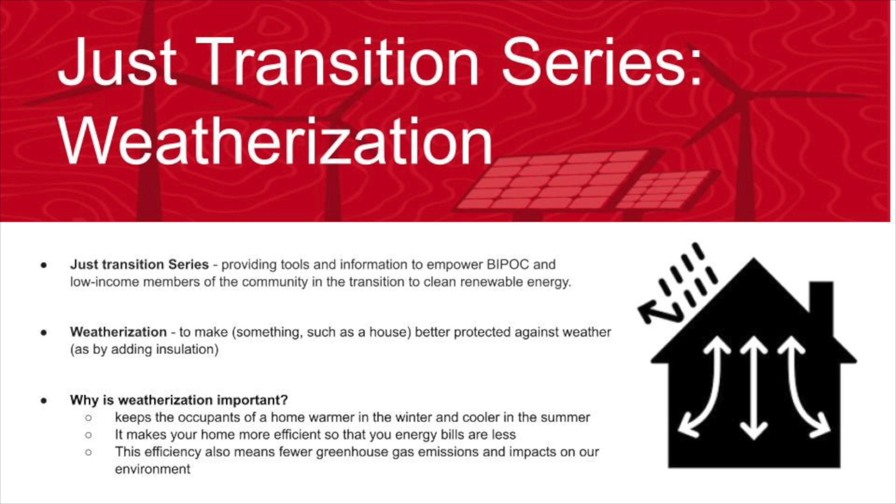In its basic sense, weatherization refers to measures which better protect homes from the elements, like filling gaps and adding insulation. Our presenters will go over this in more detail, but I wanted to go over a few slides to talk about how this connects to justice and equity.

Okay, so first I just wanted to start off with this graph. I think it's a helpful visual to see how your typical home uses electricity or uses their energy. As you can see, the vast majority of energy use is used for heating and cooling, whether that's air or water. So when we look at ways to make your home more efficient, it's a really significant way that you can cut your emissions and decrease your utility bills, if you're making sure that the heating and cooling you're generating is staying within your home.

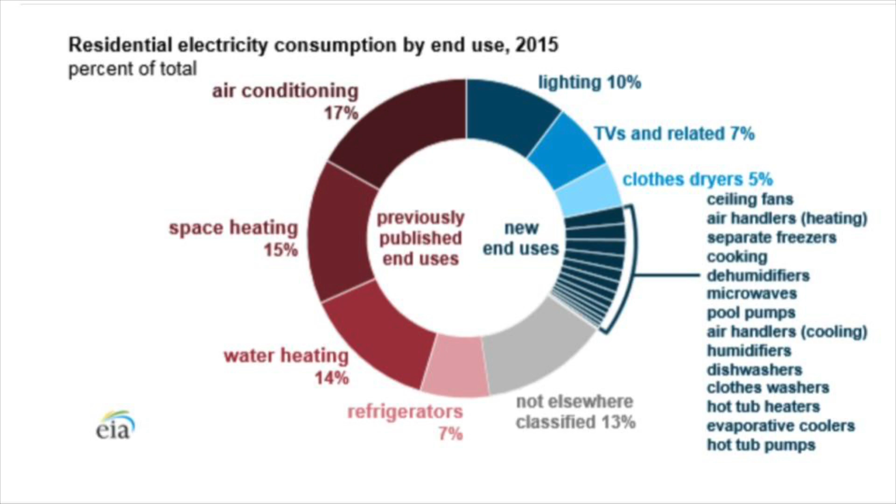As folks may have noticed, the cost of heating and cooling our homes has been up recently, and it's not just because of inflation. Rate hikes are increasing gas bills about 42% over the last 13 months, which is pretty dramatic.

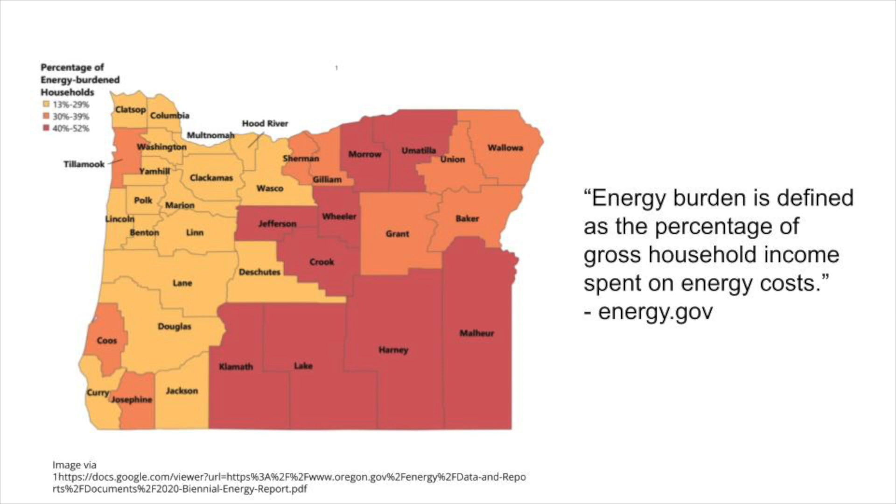The term energy burden refers to the percentage of gross household income that is spent on energy costs. Low-income households typically spend a larger portion of their monthly income on electricity, gas, and heating. According to the U.S. Department of Energy, the national average energy burden for low-income houses is around 10% or more, which is about 3 times higher than households above the low-income threshold, estimated at 3.5. In some areas, energy burden can be as high as 30%.

So the people who are making the least amount of money are paying the most on their utility bills, which is silly.

Why is this the case? Because low-income and historically marginalized groups are more likely to live in housing that is deemed not adequate. According to U.S. Census data, low-income households make up 37% of respondents, but represent more than half, or 56%, of households with inadequate housing conditions. So this, among other things, can mean that a house may not be well insulated, there may be gaps, there may be other things that cause the houses to leak heat, therefore requiring more energy to heat or cool.

Adding insult to injury, low-income households have the least access to energy-efficient appliances or other clean energy technologies, such as heat pumps, which both heat and cool homes. As we know, in Oregon, the summer heat waves we are now experiencing require cooling. In a lot of cases, heat-related deaths are going up. It is dangerous not to be able to regulate the temperature in your home as the climate is changing.

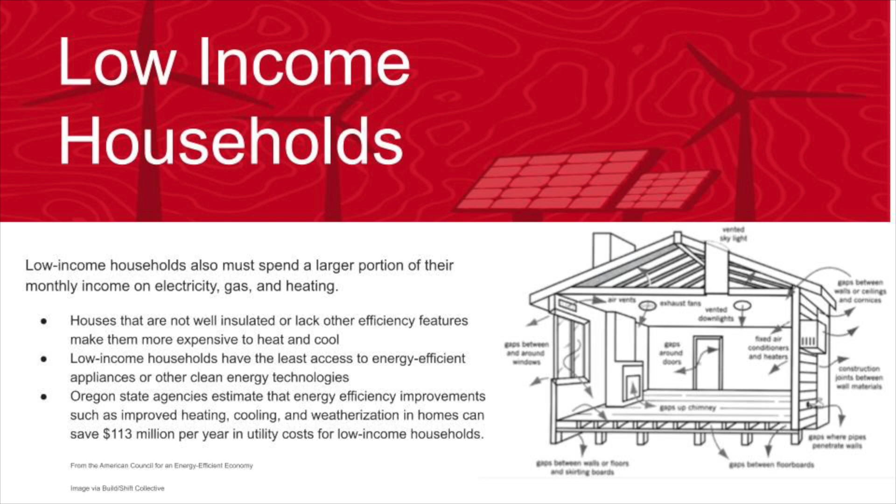Oregon state agencies estimate that energy efficiency improvements, such as improving heating and cooling and weatherization in homes, can save $113 million a year in utility costs for low-income households. So weatherization is a great tool to help folks lower their emissions and reduce energy burden. But I want to turn it over to the experts, so I'll hand it over to Charlie.

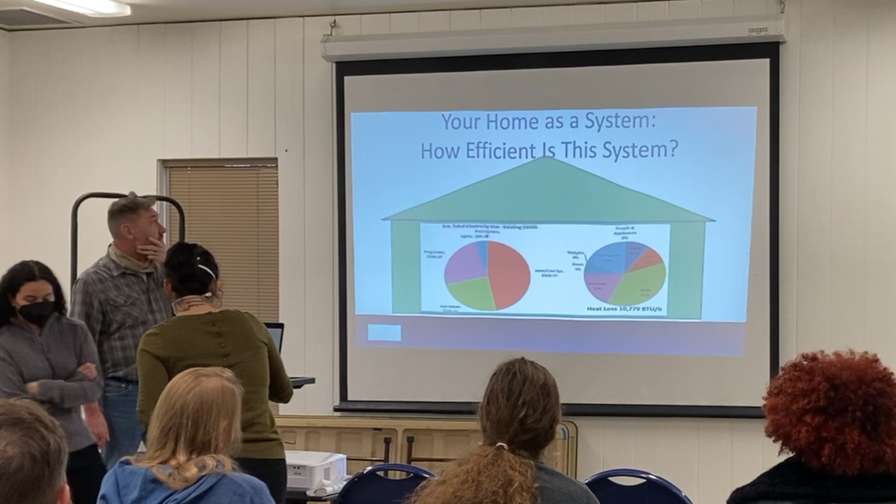So I'm Charlie. I work with EWEB. I've been there since 2001. Before that, I was with Springfield Utility Board. I'm a Springfield boy, a Lane County boy. I grew up here since 1966.

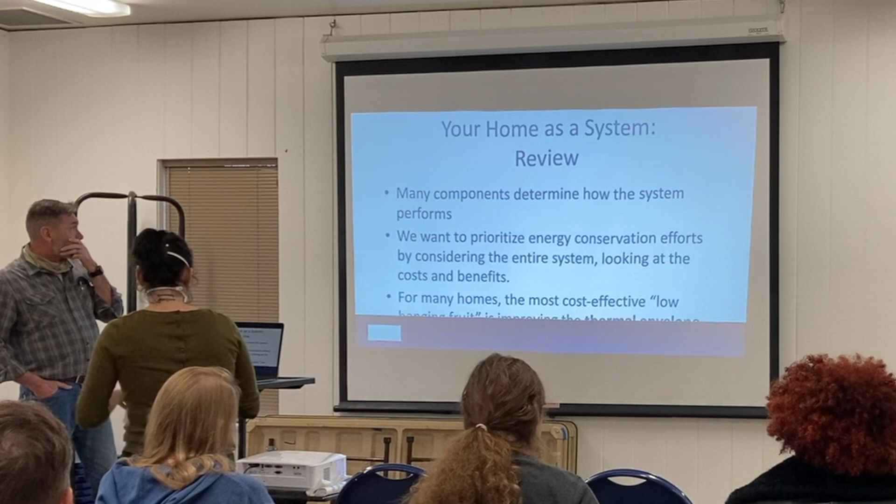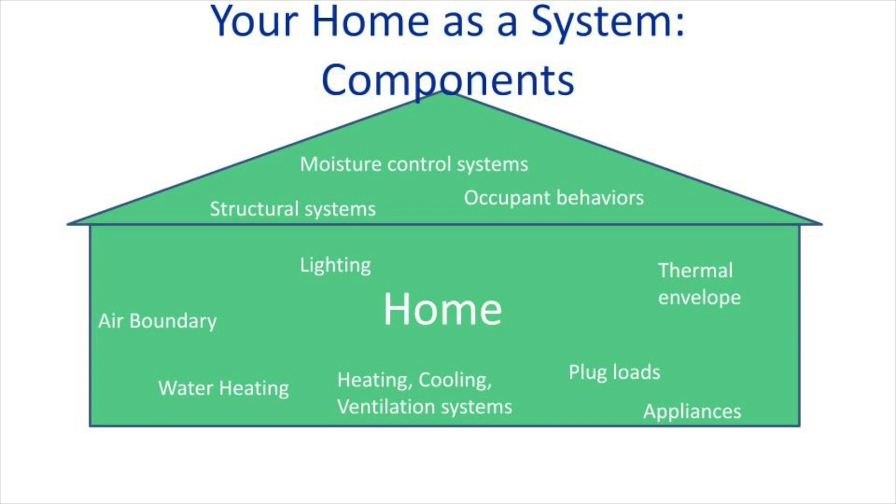I do a lot of these educational profiles, I do a lot of energy education, so we tend to look at the house as a system, and there's a lot of interactions. We've got moisture control, structural systems, trusses, walls, headers, and so on, and occupants' behavior. When we talk about the thermal envelope, we're talking about the exterior, the outside, as well as windows, floors, and attics, plug loads, heating system, appliances, lighting.

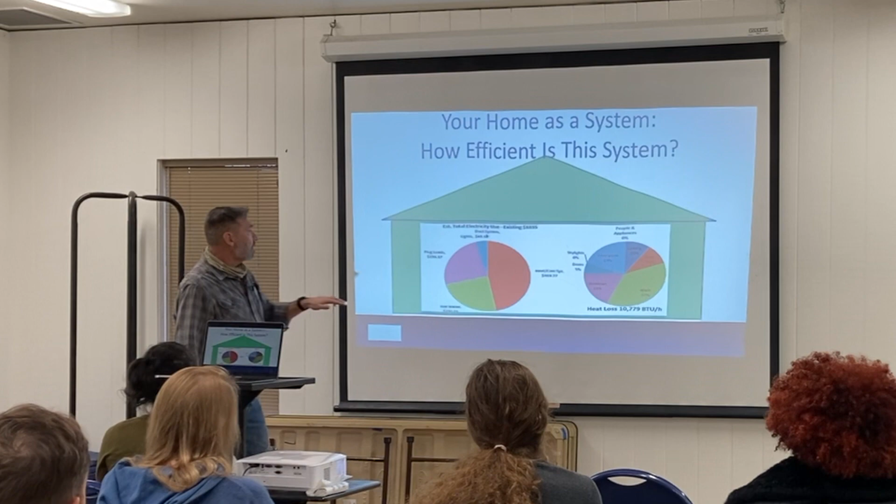A little bit different graph than what you just saw, but kind of along the same vein. In our climate zone, west of the Cascades, probably in the wintertime, you're looking at close to 50% of your utility bill, whether it's gas or electric or wood or oil, going to heat your house. About 50% of your utility consumption is going to be heating.

Just a little bit less than 25% for water heating, again depending upon occupancy, how many people, what kind of hot water load you have. These are just rough numbers. Plug loads have become a huge deal—they weren't like this when I got into it in the 90s. Most people didn't have iPhones or laptops back then, etc. Then there's lighting, and cooling is mixed in here somewhere as well. Cooling in our zone has gotten warmer, but it's still a relatively thin slice of your overall utilities year round.

When we take a look at that, I'm looking at this from the heating side and the water heating side primarily. Then we can start breaking out the house as a system. Walls are a big source of thermal loss. This is the heat loss for a home, close to 11,000 BTUs per hour—and that's a low number for a home, honestly. We're right around 37% for the walls. The next largest area, which you might imagine, is a hole in the wall covered by glass—a window—at 19%. Then doors, and infiltration, which is leaks in the house. Ceiling and floor account for about 10% apiece, for about 20% total.

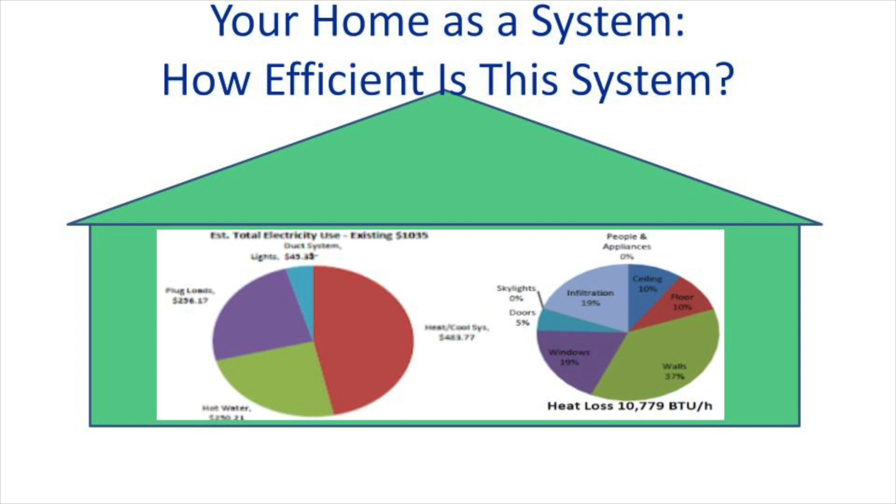So that gives us an idea of how to attack the home in terms of the thermal envelope. The idea here is to concentrate your efforts where you get the biggest bang for your buck. I'll condense this slide for you—that's basically what we're talking about.

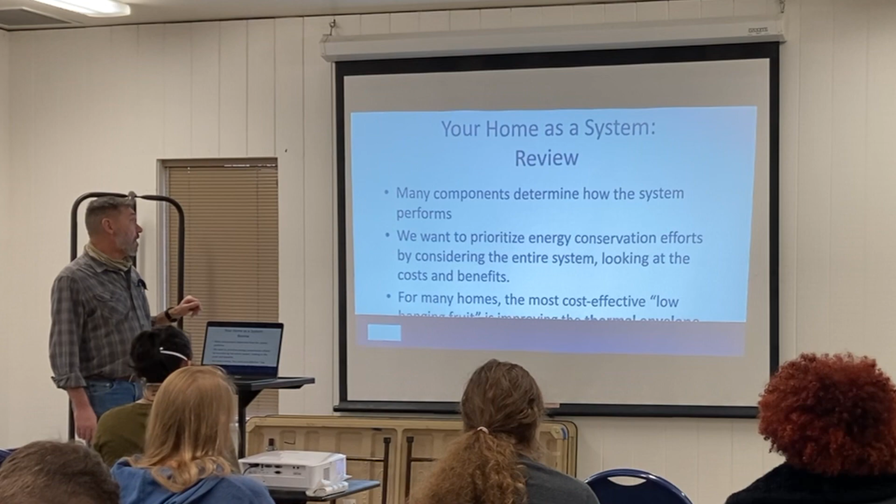In most homes, the low-hanging fruit is not going to be a new expensive $20,000 heat pump system or better—it's going to be insulating your walls, floors, and attics. Insulation, maybe new windows if you've got single pane windows, and there are other things you can do with existing windows. Also take a look at air barriers and penetrations—air that's leaking into the house, for lack of a better term. So you're looking at this in terms of a thermal plane, a thermal envelope, and an air barrier.

Now I want to be real careful about this. Insulation—fiberglass, which is most common now, or vermiculite, or cellulose—is a thermal barrier, it's not an air barrier. The fact that you have insulation creates a thermal barrier, but it doesn't do anything for the holes that are in there. Air still comes in and out of it. I want to be real clear about that.

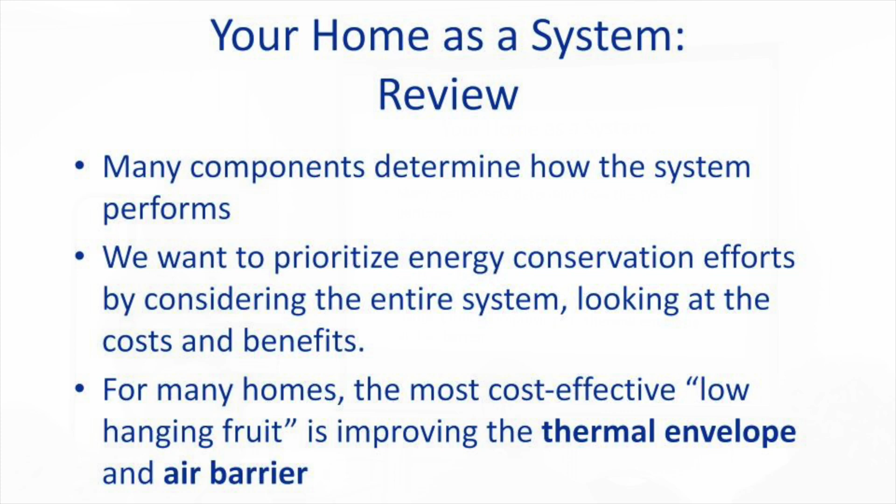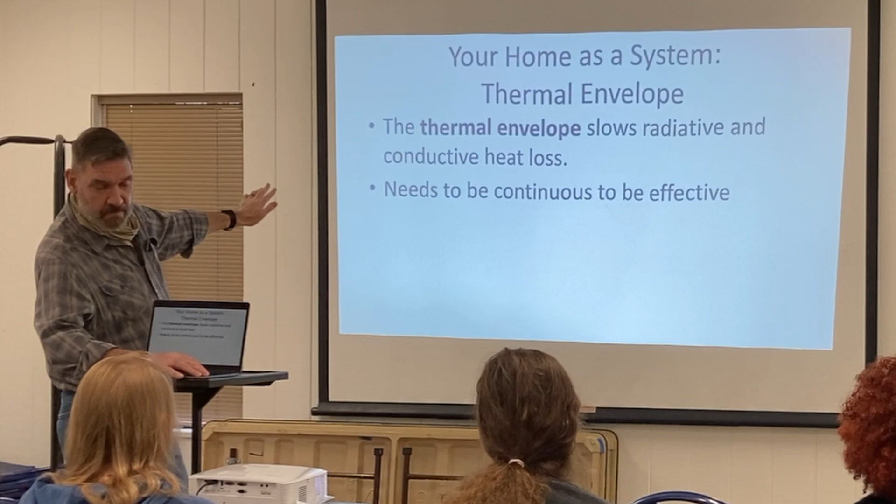So this is kind of where I was going with it. The thermal barrier slows the heat loss, the conductive loss—the holes in the wall, eliminating those in the floor or the attic. And you eliminate infiltration, air leakage.

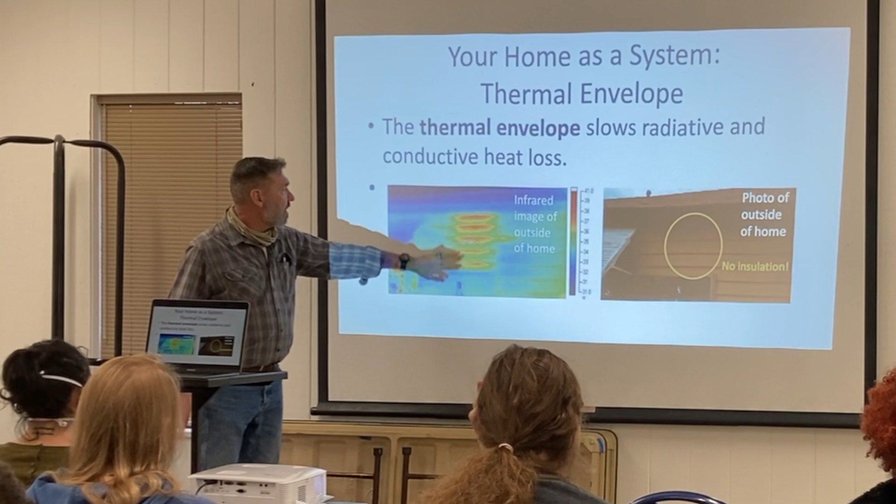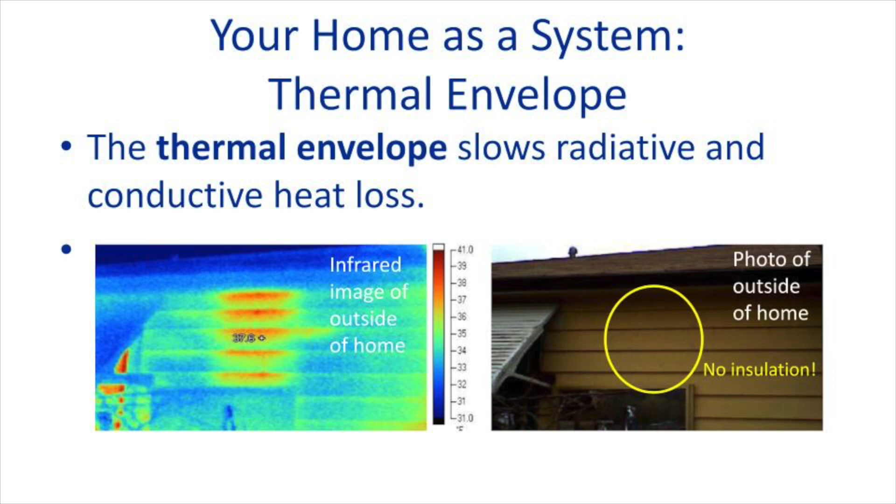This is just an example—we use infrared imaging, which has really come down in cost. This shows this area over this window right here; you can see the heat loss coming out through the infrared technology. There's no insulation in that. One thing to remember about heat energy: it moves to where it doesn't exist. Every bit of heat in this building is trying to pass through this wall to this window, and this building is trying to come to a thermal equilibrium with the outside. So this is where significant heat loss is going on, as outlined by the camera here.

The easiest way to deal with that is insulation. The way you deal with insulation in the wall is, depending upon the exterior wall components, we pull the siding off—lap siding that comes off, and they tack it back up. They drill holes in the wall and fill it up with insulation.

Floor insulation is really unique in this perspective. If you're insulating something, it has to be in contact with that thermal barrier for it to work. So if you crawl underneath your house, or like me, you do the flashlight thing, you look up, and you see your insulation bowing in the floor, it's probably not doing what it's designed to do. You've got an air gap in there and it's not insulated because it's not touching the subfloor. Resupport it, lath, twine, whatever you got to resupport it. I'm trying not to step on your toes and do it yourselves too much.

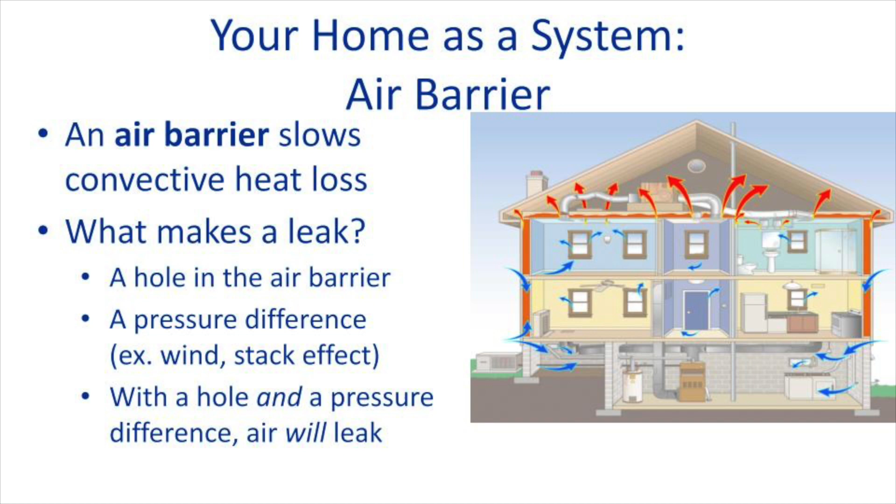This is a good slide for talking about where the leaks are at. First thing I do, I get a lot of high bill calls this time of the year. It's the other thing to understand, when it gets cold, your heating bill goes up, right? That's based on temperature difference, what we call delta T. It takes more energy the larger that difference is to keep your house at 68 or 70, whatever you're heating to. When I walk into homes, the first place I go and look is if they have a fireplace.

I shine my flashlight up there. There's a penetration that if you don't close that damper, that's a hole this big in your house.

There's a little bit of energy. Fireplaces are a terrible way to heat your house. But they're great for having a glass of wine on a Friday night with your spouse or significant other when the kids are gone. I'm not the Nazi about that stuff, but recognize this: as the fireplace is heating up, it's pulling warm air out of the house. It gets to a point where it's finally actually putting out a little heat, and then it dies down. Nobody can close the damper while it's dying down without dying, or waking up with a very big face and a headache. So don't try to heat your house with that. It just won't work. Stoves, inserts are a little bit different thing, obviously, but fireplaces, even with sealed glass doors, please don't heat your house with them. Anyway, that's my little Gestapo brown shirt.

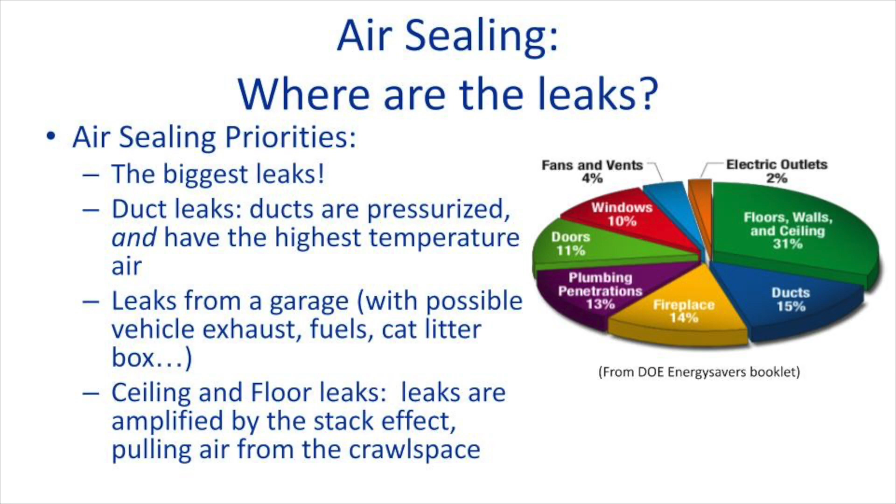Doors, threshold kits, anytime you can see daylight through a door. Weather stripping, I think there's some stuff back there for that. Weather stripping, threshold kits, these are all available at any of your local retailers, Lowe's, Home Depot, Walmart, blah, blah, blah. They're all there.

Fans and vents, just the penetration through the ceiling is probably the first place that you'll see a hole. They're not foamed, they're not gasketed, they're there. The other thing is that exhaust fans should have a butterfly damper in them, so that the only time they're open is when the fan's running.

Outlets, switch plate covers on exterior walls. There's one down here for those that you can't see. You put your hand on it right now, you can feel it's conducting cold. On a windy day, you'll probably feel a breeze. They make gasket covers, I have some back here as well that you can take a look at. They're just a little styrofoam gasket. You pull the switch plate cover off, put it on, screw it back on.

And then floor, ceiling, the wall, again, these are plumbing penetrations.

Romex electrical wiring penetrations. None of them are foam, unless you do it yourself. Let's move on. The other thing I should mention is don't forget the penetrations to the garage.

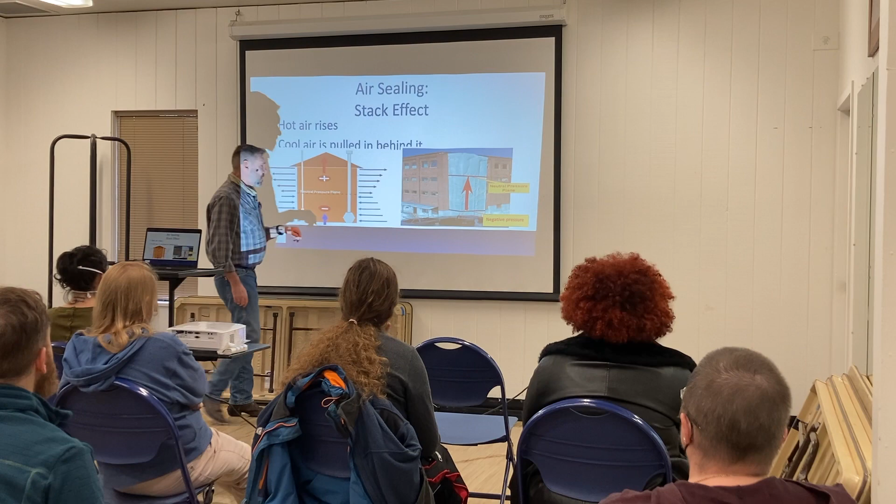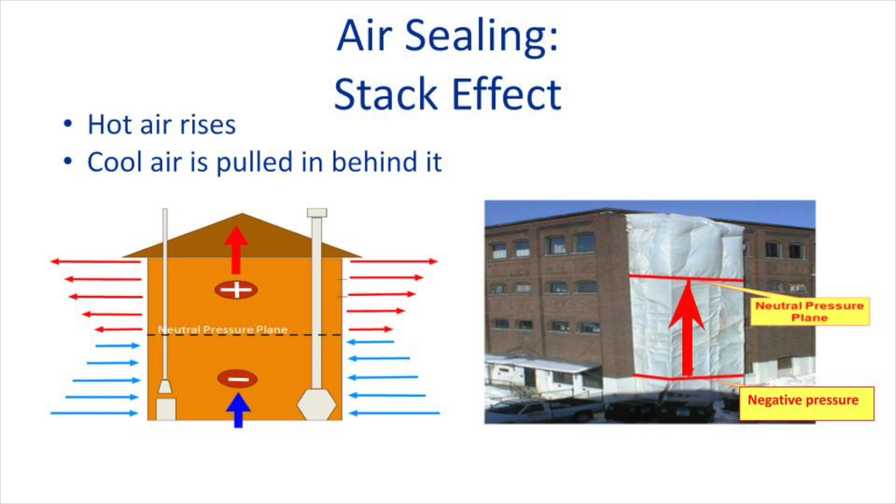You can get nasty carbon monoxide from that. This is the stack effect, a great slide. You probably can't see it too well, but this is a building with a lot of leaks. On the lower levels where the air is cooler, it's pulling in air. As it warms up, you can see this collapsing and this expanding. That air is coming in, heating up, and getting expelled out of the building through leaks. This is what they call the neutral pressure plane, probably somewhere where no human actually exists between levels.

My wife asked me to do that. She was crazy when I did it.

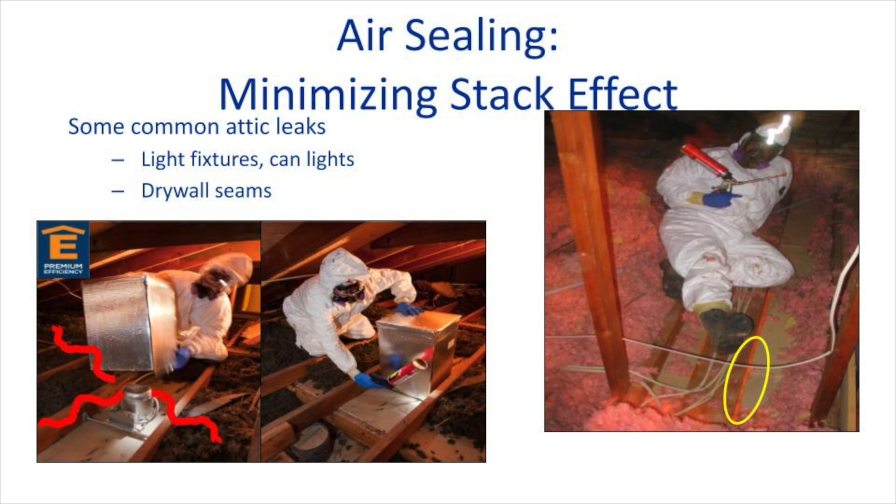More of the same stuff. This is ductwork leaks too. This is building some fiberboard cans over recessed lighting to keep it from leaking, but also to keep insulation from going in there when they blow the attic to re-insulate it. The pink fuzzy stuff that makes you itch insulates your house.

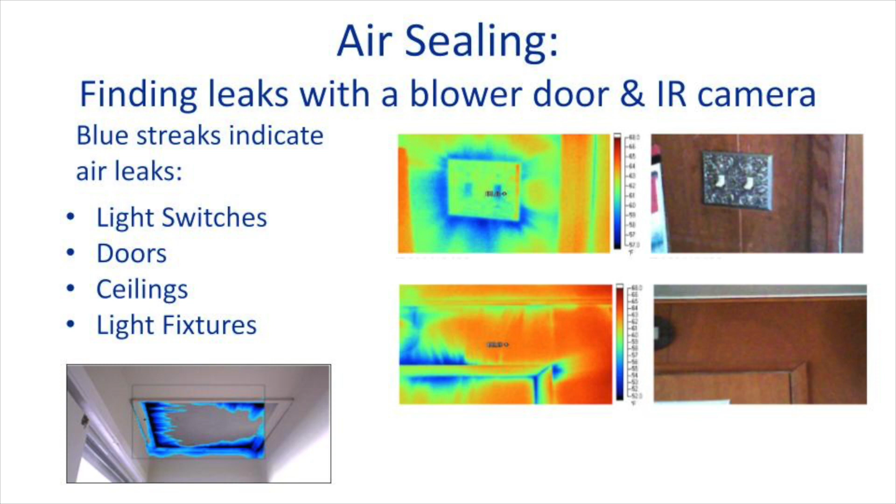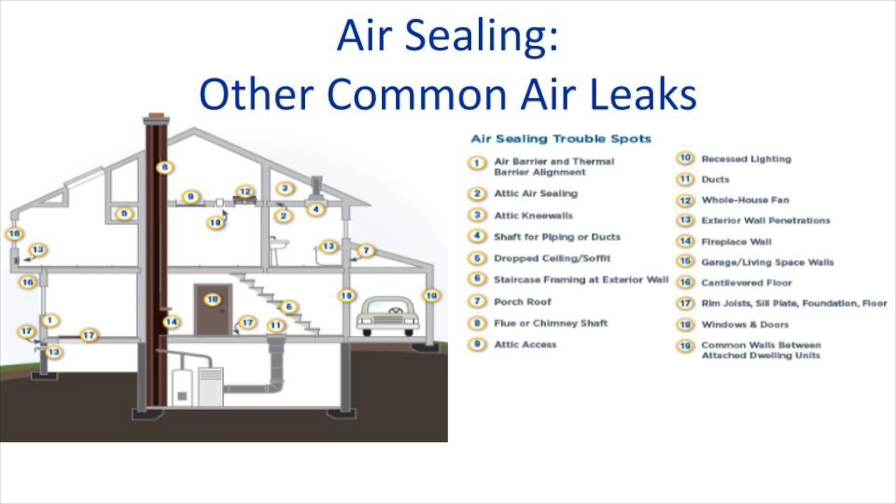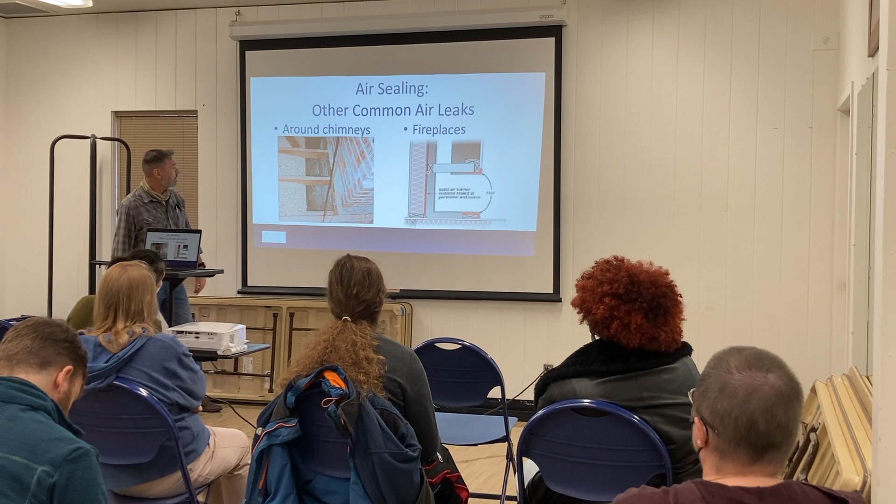Let's move to the next slide. I'm not sure where we're at - common leaks, just about anything you can think of, but there's a list of it there. Cantilevered floors and pocket doors leak like a sieve to the attic and crawl space. Fireplace walls - they built the framing around the fireplace flue in the attic that should be filled up. Here's a great example of what I was talking about: the chimney up in the attic isn't sealed. In that spot, your attic and your house are communicating.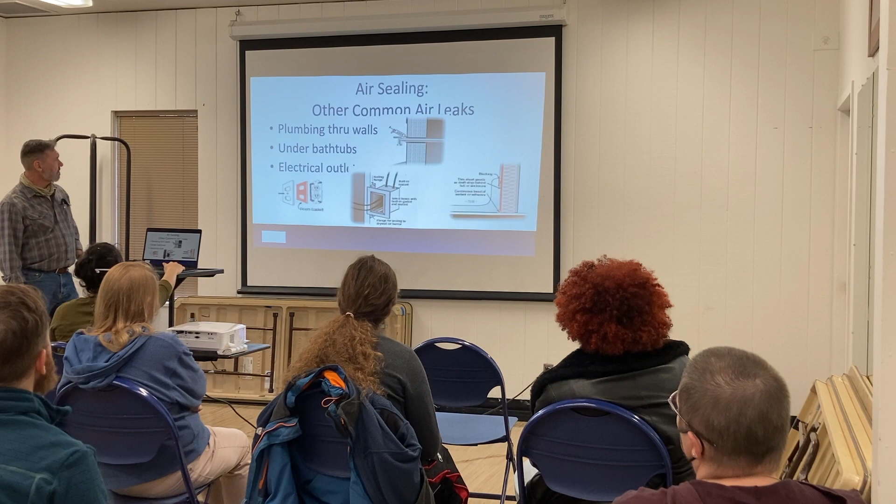I think we've gone pretty much through the slides. Let's go ahead and kill this. So, anyway, I'm trying to get through this without boring you to tears.

EWEB - in Lane County, we're blessed that all the utilities here are public utilities: Springfield Utility Board, Emerald Peoples Utility District (EPUD), Lane Blachly, Lane Co-op, and EWEB, Eugene Water and Electric Board. We all offer conservation and energy management programs for electrically heated homes, since we're the electric utility.

Now, don't pay attention to that slide - I've got a list of stuff back here. I've brought an EWEB program, a one-page sheet of all of our EWEB programs. If you're electrically heated, we offer insulation, window programs, air sealing programs, heating programs, ductless and ducted heat pumps, rebates, and zero interest loans. In an effort to also move away from gas homes, we offer rebates and zero interest loans for gas or oil heating homes to go electric, to go into electric heating systems.

Once you have that electric heating system in your home, now you're qualified for the weatherization zone. We have income-based programs for electrically heated homes. We work with the Homes for Good Housing Agency, and they help reimburse our low-income program. Our limited income programs are based on 200% of the federal poverty guideline or 60% of median income - they're pretty interchangeable for the most part.

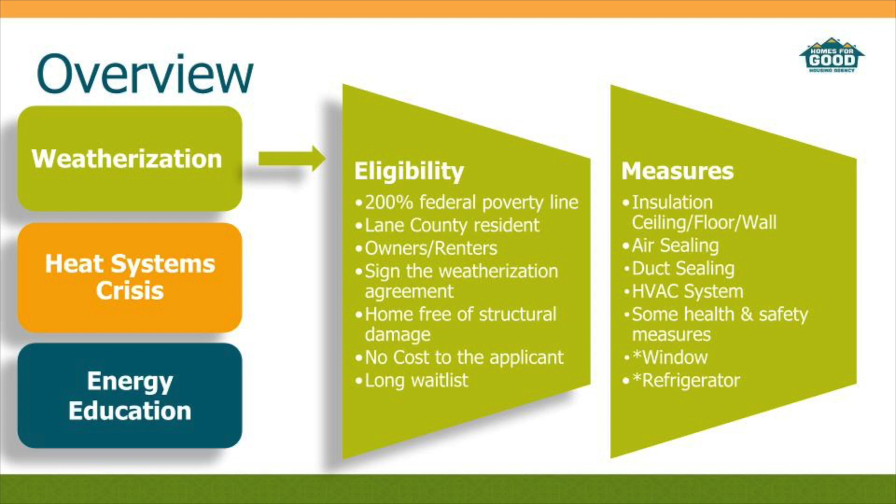The program is absolutely free, no cost, but the downside is we have a really long wait list. With COVID and supply chain issues, it's taking a little longer to finish. You can go visit us online at homesforgood.org and sign up. I recommend you do, but it's going to take us a while to get there.

The next program is the Heat Crisis Program, which is only a seasonal program running right now. The only thing we do is if somebody's permanent heating breaks, we're allowed to go there and fix it or replace it, or even upgrade it. In some cases we go there and what they have is old baseboard electric heating that broke.

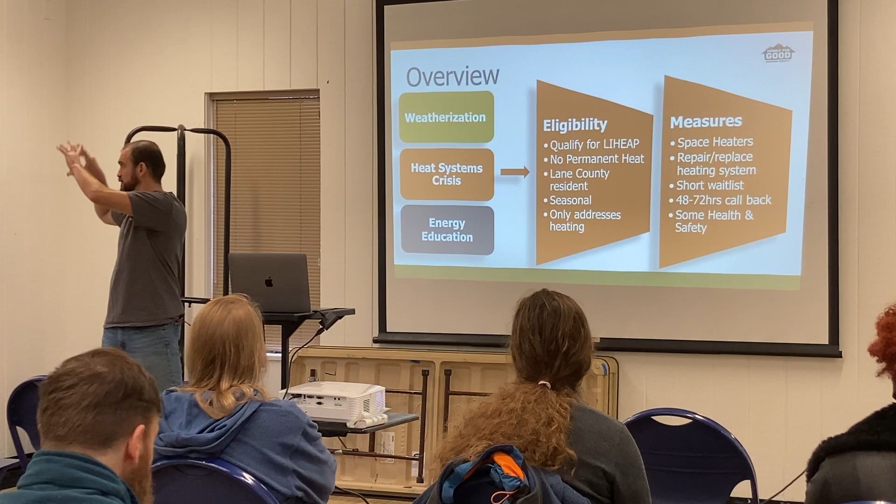We were able to go to DHP right away, sign you up for weatherization. Eventually when we get there, you'll be set and have a much better unit. DHP is a ductless heat pump, those little split units you see on the wall. We're allowed to do some of those thanks to programs like Charlie's and some funding with them.

Our last program is energy education. We do client direct education, as we call it, when we go to the home. When we assess the home to see what we're going to weatherize and what we're allowed to do, we talk to the clients the same way Charlie just did. This is everything that we see going on.

This is all the things you can do yourself to save some energy, and we do some equipment demonstration at that point. We also give them some written materials and other things like that.

We also do, as part of that, some community events, things like we're doing right now. We come to a workshop and talk to different folks. Sometimes we're able to bring some props. I wasn't able to get my hands on one prop we use sometimes, which we call a little glass house, literally a house made of plastic glass. We're able to demonstrate a lot of these things, and people can see it, and it's fun.

So sorry I couldn't get my hands on that one this time.

All right, so we're going to jump into the main program, which is the DOE Weatherization Assistance Program, the Department of Energy Weatherization Assistance Program. So like Charlie said, what we do is see the house as a system, but we break it down into a system of systems: the mechanical, the building shell, and the health and safety aspect.

We do everything having to do with the mechanical system, so that's your water heating, your HVAC system, the insulation, and the leaks in your duct, which is a big deal.

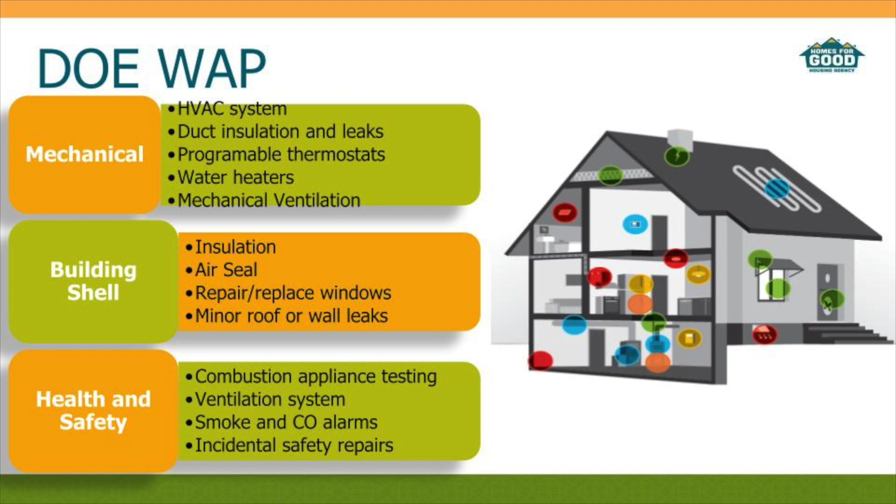That's tricky because in some cases we're able to replace an entire roof. There are actually people who live in mobile homes that have the old flat roofs, and some of those roofs we're allowed to replace entirely. In many other cases we're only allowed to repair small leaks and things that would affect or compromise our work. We're not going to do any weatherization if there's those leaks, so we're allowed to fix them.

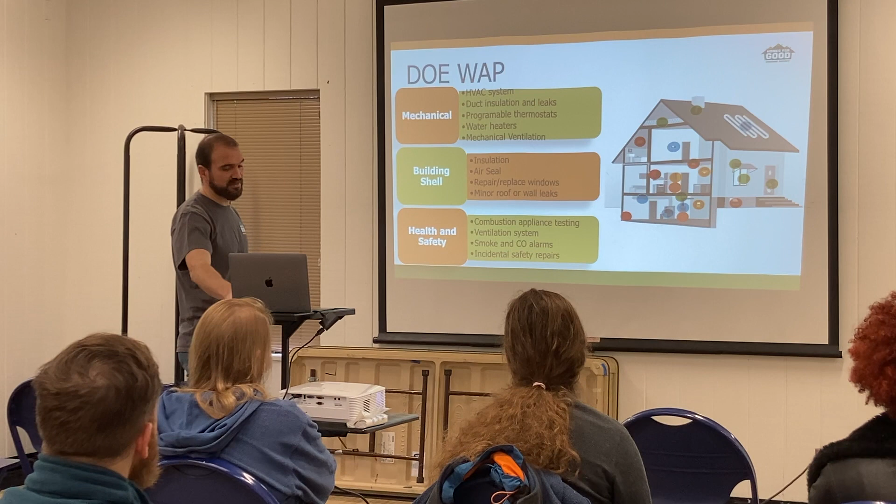So why do it, right? What are the benefits? You'll get energy savings, water savings, lower out-of-pocket health costs, and lower interest payments. In some cases there's no interest payments, like Charlie was saying, but some folks do get into debt trying to figure out a way to weatherize their home or be more energy efficient.

The Weatherization Assistance Program was born in the 1970s, maybe '76, I don't remember the exact year, but the DOE program started around there. The idea is to help folks, low-income families, not have to pay as much and to save on their bill.

But there's also a whole set of other benefits. There are about 8,500 jobs generated from this, and a total of about 35,000 homes served. That all comes from the 2021 DOE Weatherization Assistance fact sheet—about 35,000 homes served every year, which is a lot nationwide.

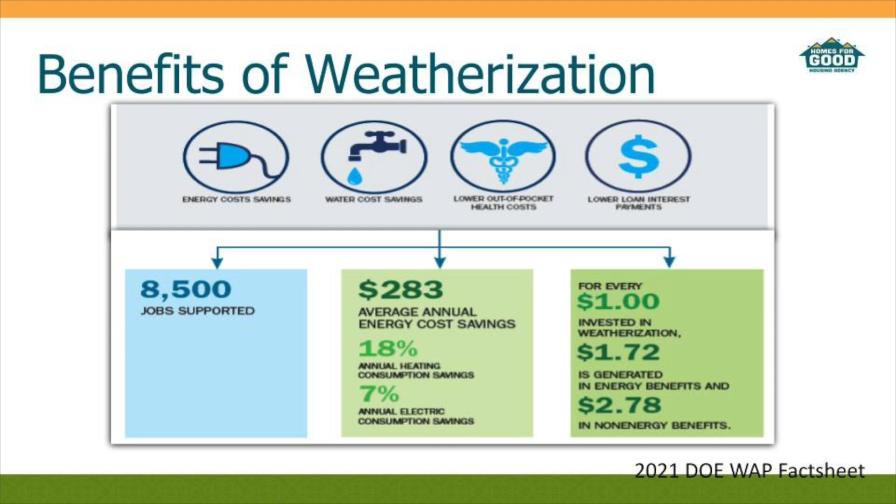There's also an average annual energy cost savings to the families themselves of about $283. And there are other benefits: for every dollar we invest, there's about $1.72 that you recoup in energy-related savings, and about $2.78 that you benefit from that isn't necessarily direct.

What I mean by that is this: it's a community impact. The energy burden Aya was talking about before—this is from 2021—is the percentage of your gross income that you're spending on energy. For people below the 200% poverty line in 2021, they measured an average of 13.9%, which is almost 4 times what the rest of the population spends, about 3.0%.

So with this program and the dollars we all put into this, what we're able to do is give you some savings and improve your health and safety. We have health and safety related benefits of about $14,148, meaning no out-of-pocket expenses for missing days of work, because now you live in a nice, comfortable, warm home—not missing days, not having the out-of-pocket expense.

That was determined to be about $514 in direct out-of-pocket health expenses, according to a study I have in my notes—I don't remember it exactly off the top of my head. It's the Oak Ridge Laboratory, or Oak Ridge National Laboratory, study. I can get to that in one minute. Anyway, those are the benefits above and beyond the rest.

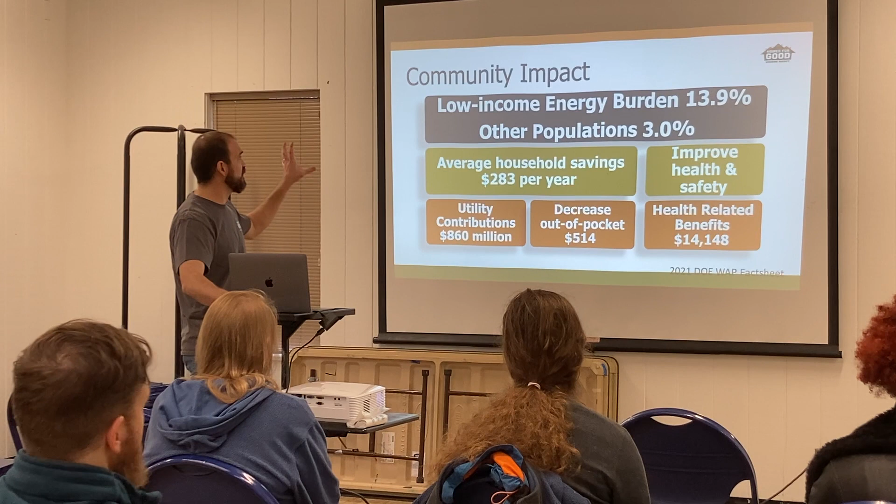So now, you all learn much better when it's humorous. So I've got a little laugh for you, because that way you'll memorize some of this, and I'm going to give you a lot more facts. So let's jump right in.

We all keep talking about energy, right? Energy this and energy that, but it's sometimes hard—like, what is energy? How do we measure energy? It's not a pound, right?

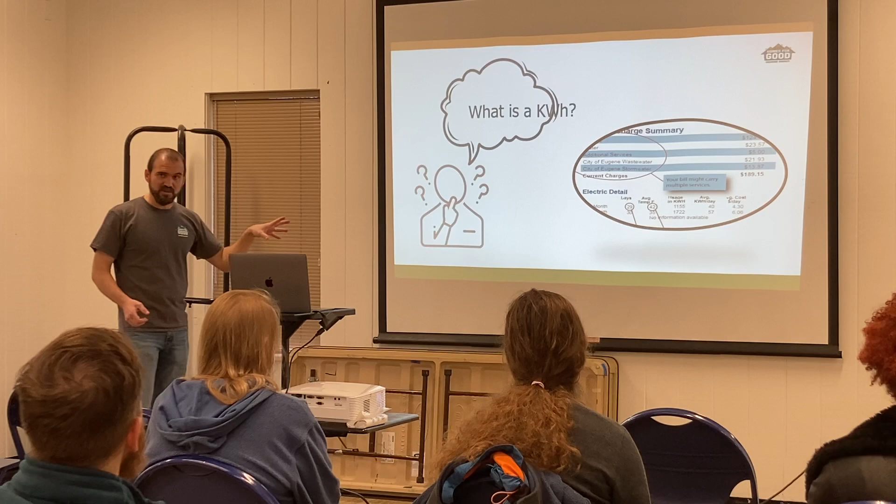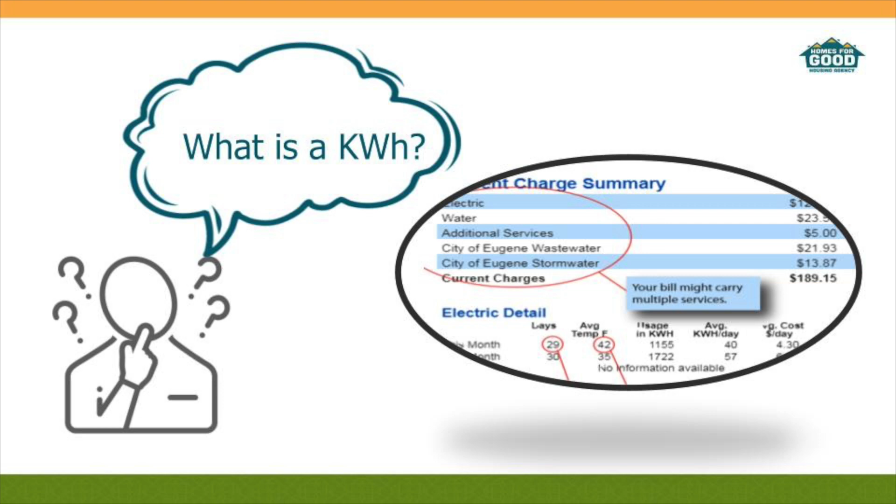We don't measure it that way. We measure it in kilowatt hours. And bills can be complicated. That one right there is straight out of EWEB, and it's like, what am I looking at? Very complicated. You look at it and try to figure out, what do I owe? What am I paying for? What is going on here?

So, you pay for kilowatt hours, it's called. And like Charlie said, there's many things that can affect that, because heating and cooling is what actually affects your utility the most. When the temperature outside is really, really cold, depending on how many days you're being billed for, that's how you're going to see your bill change.

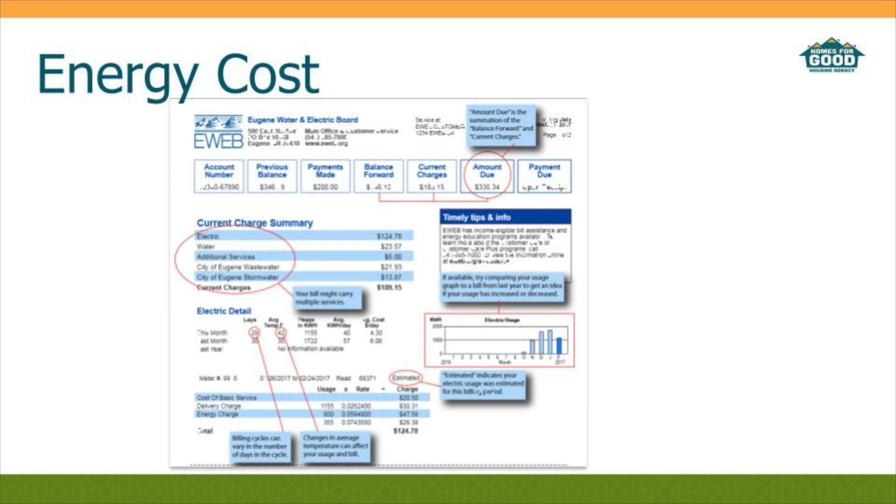I'm going to let Charlie put some other thing running through that one. I'll tell you a quick calculation. This is kind of what we do when we go to your house to do weatherization, and you can do it yourself too. There's actually a very small tool that they sell, called a Kill A Watt, spelled K-I-L-L, dash A, dash W-A-T-T.

You plug it into your wall, then plug a device into it, and it starts telling you. You plug it in for, say, 24 hours, and it'll tell you how much that device used. You can start measuring through your house, well, where am I using my energy? What is using my energy? Your energy usage is basically whatever the appliance uses, on average, times the amount of time you use it—that's your kilowatt hour.

So if you have an old fridge like that one that uses 0.19 kilowatts, times 24 hours, you get about 4.66 kilowatt hours in one day. That means 4.66 kilowatt hours times 365 days in a year times 11 cents, which is what a kilowatt hour will cost you on average. This fridge is costing you $187 a year.

So if you have one of those and think, I'm going to put it in the garage now that I got a new one—well, that's how much you're paying a year just for having it there. Sometimes we have to think about those pieces. Updating or upgrading to an Energy Star refrigerator will cost you about half of this, maybe even a little less. So now you're saving $90 a year, which can be a big difference.

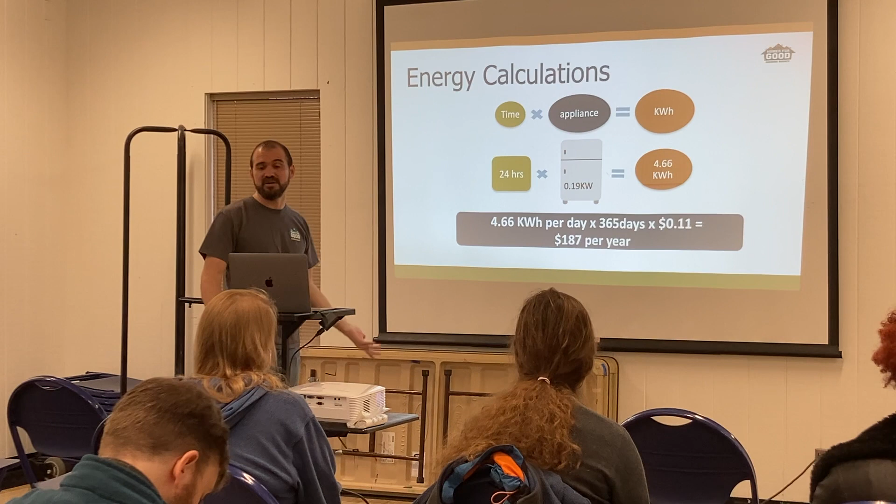So where does the energy go? My colleagues have seen all this, and we have very similar numbers. Space heating, we've measured, is about 35 to 60%. Like Charlie said, this time of year, 40 to 50%. Water heating is about 25%, then refrigeration and lighting.

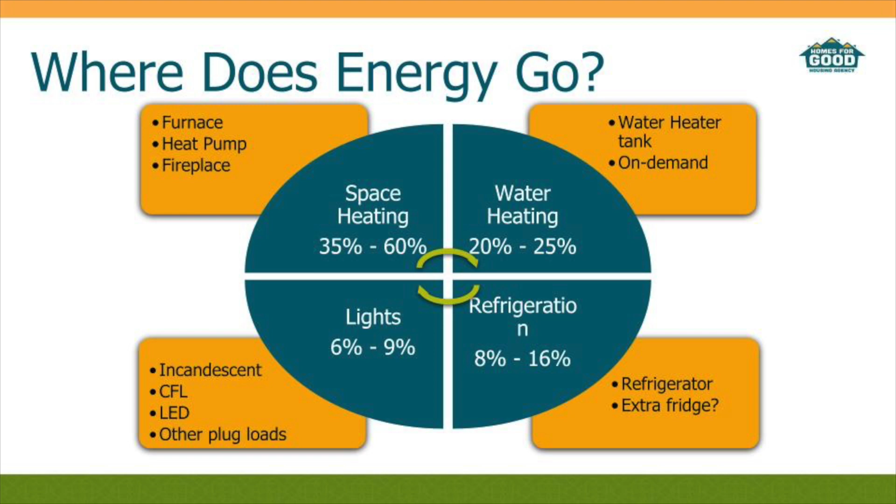What kind of things can be done about that? That's what we're going to jump into on the next slide. So let's look at it that way—space heating, we'll look at that first.

Some of the tips I had for space heating overall: number one, dress for the weather. That sounds really silly, but it happens a lot. We walk into somebody's house and they say, my house is cold all the time. Well, it's 35 degrees outside, and they're wearing a t-shirt, shorts, and flip-flops. A sweater will go a long way and save you a lot of money—it's a lot cheaper than anything else.

For room temperature, we always recommend setting it at 68 degrees in the winter. There's something called a setback—if you have a programmable thermostat, you can program it to go down to 58 Fahrenheit while you're sleeping. You can look this up, but you sleep better when the temperature is a little colder, so you'll get better rest under the blankets. Believe it or not, just setting it back a little will save you a lot of energy.

The only caveat is if you already have a heat pump, you never want to set back more than 3 degrees on your thermostat, because the heat pump will kick into emergency heating, which uses a lot more energy. So we don't want to do that—never set back more than 3 degrees Fahrenheit. Now, DIY alternatives you can do yourself at very low cost include weather stripping, like what's shown there, which is what Charlie touched on before.

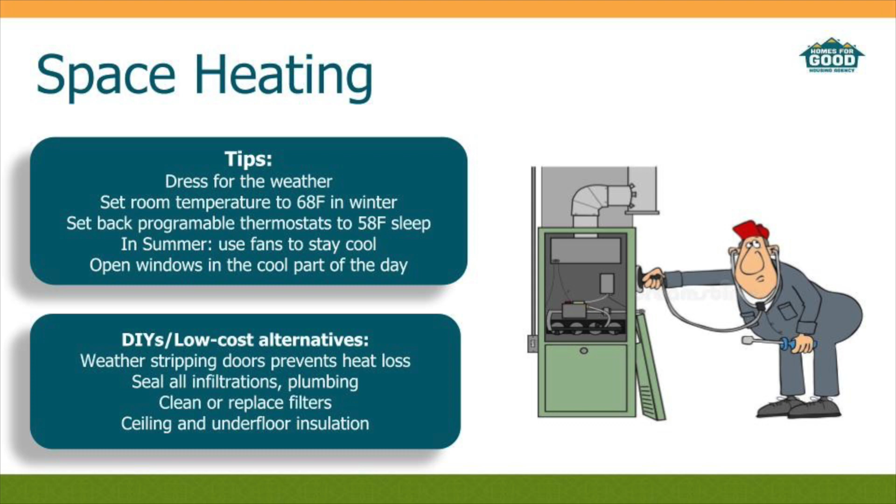Weather strip your doors, the bottom and any place where you see or feel the cold air coming in or hot air escaping. Scientifically speaking, what we're losing is actually heat. The heat is what's transferring out, so the heat is leaving.

Seal any infiltrations, especially around plumbing. I love doing this test for people - we use infrared cameras as well. We always just go and open right under the sink, and like Charlie said, you'll have a 3.5-inch pipe that the plumber decided to make a 6-inch hole for, so you have a really big hole there where all this air is coming in. All you gotta do is open it and stand there for a minute.

You can even grab a toothpick and attach a very tiny, light piece of cellophane paper, and put it right there. You can actually see it wiggle and move from the cold air coming in. That's a very simple way - you can use that tool around windows or any place where you think you might be losing heat or cold air is coming in. Then spray foam, just the spray foam can you can buy at any local hardware store, is one of the best ways to fix that.

Make sure that you clean and replace your filters, and make sure you take your filters out of the plastic bag before you put it in - it's a very important one. Sorry, I have to put that in there because I've seen it. Take the filter out of the plastic bag first, then put it in, and keep it nice and clean, because that'll save a lot of money. If it doesn't restrict the air flowing through, you're saving money and energy.

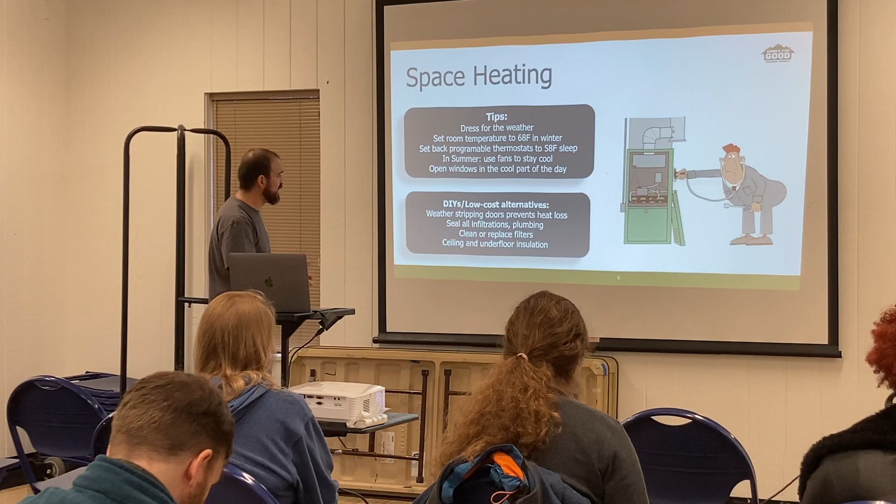Finally, ceiling and underfloor insulation. If you're able to afford it, hire somebody to help you out. The best bang for your buck is making sure you insulate under your floor and your ceiling. If you do the spray foam yourself and insulate those two areas, you'll save a reasonable amount every year.

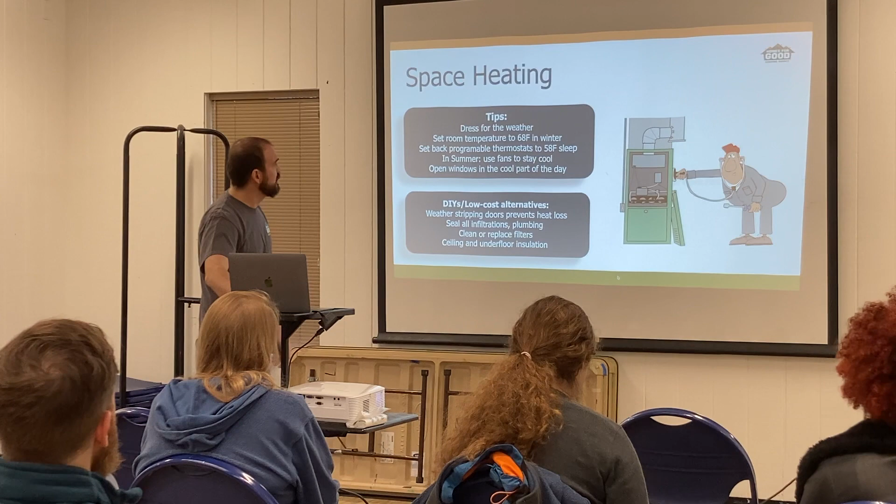Next is water heating. Tips for water heating: use cold water for laundry. You really hardly ever need hot water unless you're crawling under a crawl space like me sometimes. Otherwise, almost anything can be done with cold water washing. Take a shower instead of a bath, and make it a shorter shower - that saves too. Make sure you only wash full loads of dishes and full loads of laundry.

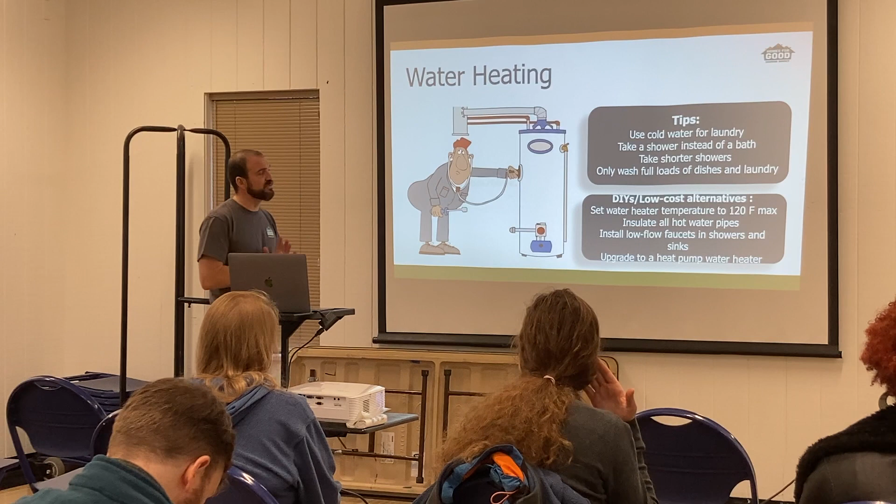Some DIY things or low-cost alternatives: first, check your temperature setting. Your water heater should not be any higher than 120 Fahrenheit. Any more than that is just costing you energy to keep that water hot all the time, and you have to mix it with cold anyway, so 120 is the recommendation.

If you're able to insulate it, they sell this foam that looks like pool noodles - a foam pool noodle. Those go all over the hot water pipes, especially the ones on your floor. If you insulate all those, that'll make a huge difference. I don't remember exactly, but it's something like 80% or 3/4 of the calls for hot water in a home never actually get hot water.

Imagine every time you open the faucet to wash your hands, you come out of the bathroom and end up using cold water anyway because you don't sit there waiting. But you called for hot water - it came from the tank, went all the way through the pipe, never made it there, and the pipe was so cold you lost all that energy. Then you'll lose it again next time. So washing with only cold water, or if you need hot water, make sure we insulate all those pipes so you don't lose that water and energy.

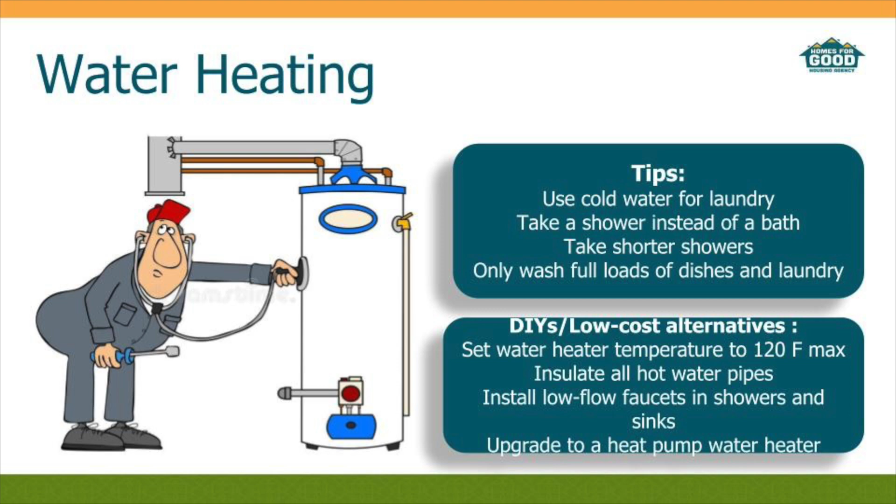Install low flow faucets and shower heads and sinks, and upgrade to a heat pump water heater if you're able to - that would make a huge difference. This heat pump refrigeration technology is about 3.2 times more efficient than regular electric water heaters, so it'll make a big difference in your utility bill.

Jump to one more, refrigeration. Not a whole lot can be done, but keeping your refrigerator full, even though it sounds kind of strange, is actually better for your energy. All those things stay cold and help each other to stay cold and absorb the heat better. Please don't leave the door open.

We see this sometimes too. People will literally just open the door and say, alright, I'm gonna go to the car and get groceries, at the car, and then they're walking in, and the fridge is open and it's ready for me to put them in. You're wasting a lot of energy on those moves.

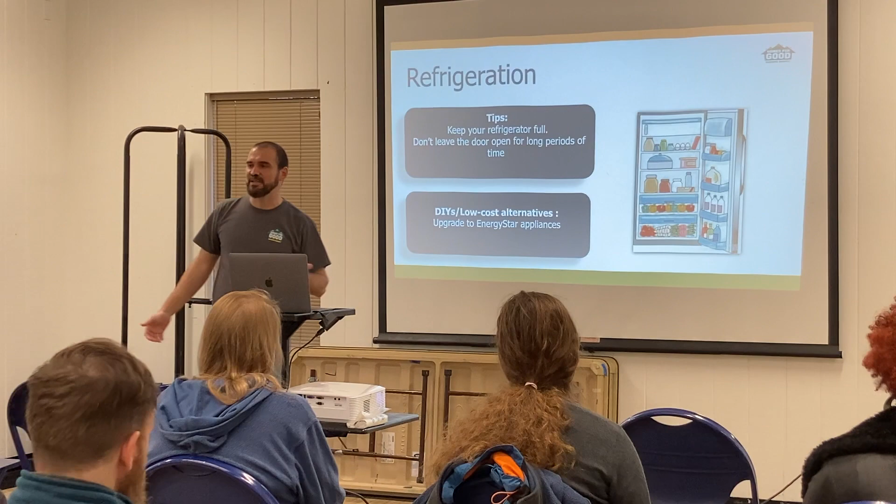Some DIY, there's not really a whole lot that can be done other than trying to buy an Energy Star appliance, and I would recommend that if you are able to do that, get a rebate or some other help. Please don't put the old one in the garage, because again, it will cost you some $200 a year to keep it there for no good reason, so you're not really going to save any at the end. So that's a lot of the things we see.

Alright, lighting and plug loads. We talked about this too. Plug loads now has become a huge deal. People have a lot of devices and all these things plugged in. There is something that we call the vampire loads. So you don't realize that all your things that are on standby, so that's TVs, computers, tablets, they're still sucking energy when they're at standby.

Some of those TVs, we have actually measured them, and they still are using 60, 70% of the energy they use as if they were on. So that's still a lot. It's better just unplug it. There are some things that you might not want to do that, especially if they require your login and all of that stuff, right? And you're like, yeah, I'm gonna have to do that again.

You can justify it. But there's some things that are called a smart power strip. And those can actually know or detect when your TV is on, for example, and then they'll power all the rest of the strip, which means your cable box, your DVD player, all the rest of the things that go in that same stand, right, for you to watch TV. And then when you turn the TV off, the strip knows it's off, so it kills the power from everything else. It just says, alright, you guys don't need to be on standby mode, and you can save all that electricity. So that's a good, easy way to do that.

If you're able to, installing vacancy and occupancy sensors, that is a great way to do it. So those are the ones that when you walk in the room, the light will go on by itself. And if you have kids, or live with kids, or have anything to do with kids, they never turn the lights off, or fans off for that matter.

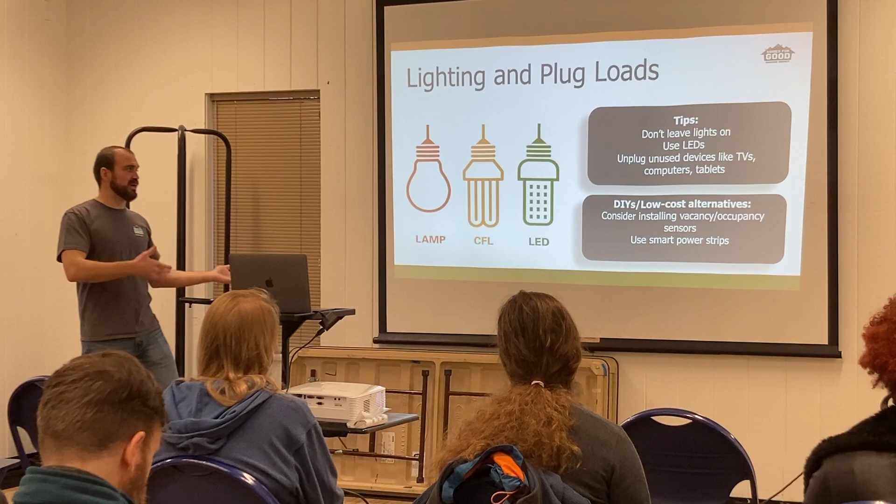So like in my house, I have some of those vacancy sensors in the fans in the bathroom. So you get out of the shower, it's still steamy, you want it to keep running, but we all forget. So we walk out of the bathroom and forget. Well, I have mine set up so that it runs for 15 minutes. If nobody walks in there, triggers the sensor, it'll just shut off by itself 15 minutes later. So you dealt with the humidity and you didn't waste all that energy and don't have to remember. So that's another quick, easy way to do that.

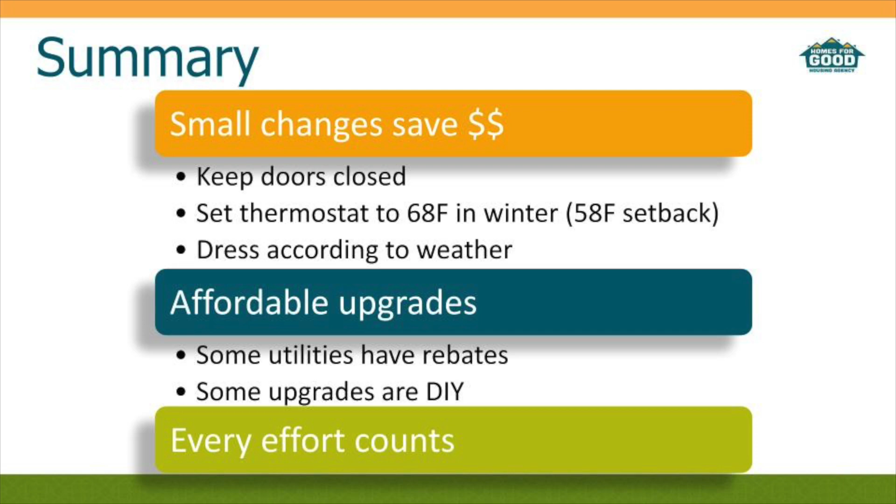And being able to do some of those upgrades yourself, focusing number one, I would say, on your envelope, so that would be on making sure you're not losing any of your heat through all the air infiltrations. So a little can of spray foam will go a long way, and then the insulation under the floor and the ceiling would be the most important ones if possible, and those are some that you might be able to tackle yourself if you're comfortable enough, or at least it won't break your bank account if you have to hire somebody to do it.

Every effort counts, everything you do matters towards it. You matter, in fact, unless you multiply yourself by the speed of light and then you have energy. Believe it or not.